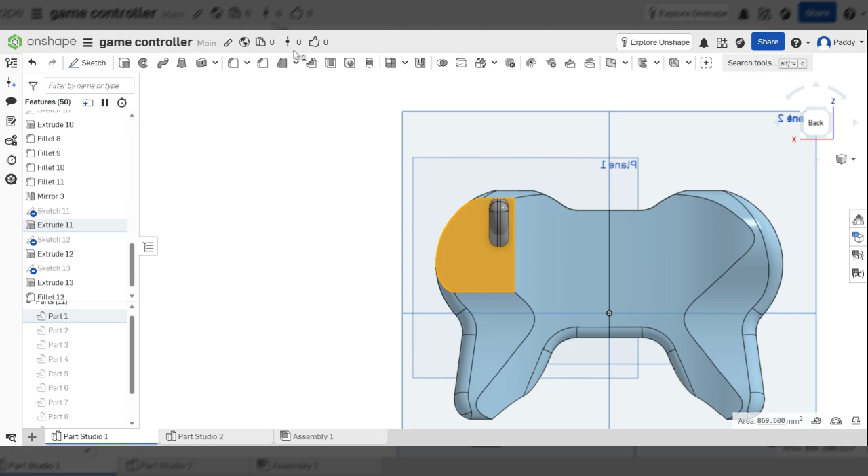Today we're going to be picking up with our sixth video for our game controller, and we're going to be drawing the hood or the cover for the trigger we made in part 4, which you can find in a link along with the rest of the videos in the series below.

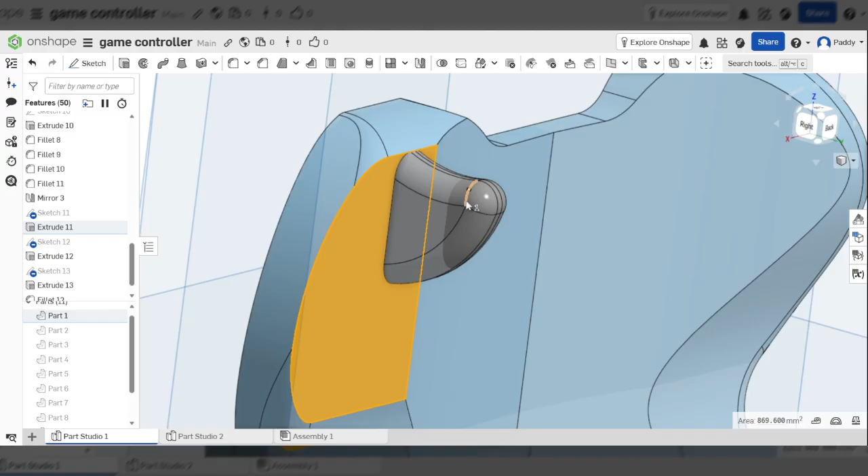Okay, so what we did last session is we cut a flat surface of the back of our remote, and we designed our trigger, and we're left with something that looks like this. Okay, what we're going to do today is, well, the first thing we're going to do is we're going to make something called a mid-plane. Now, we've made offset planes before. We've made a three-point plane that we use for our joysticks. The mid-plane, it's dead easy to do.

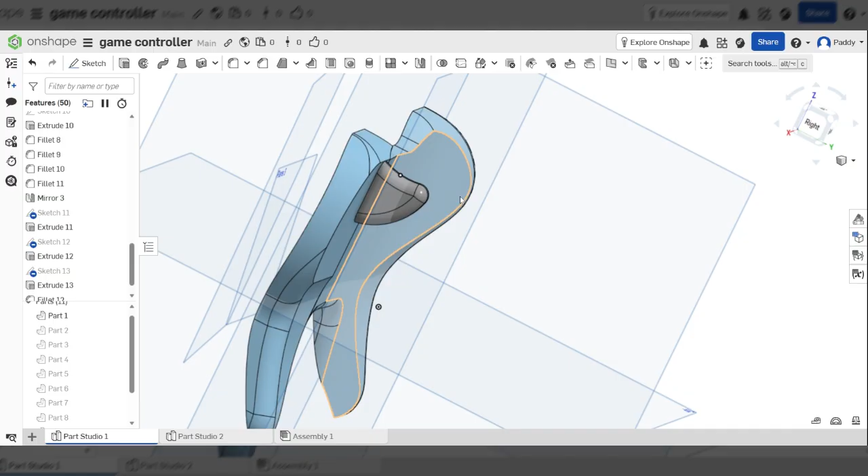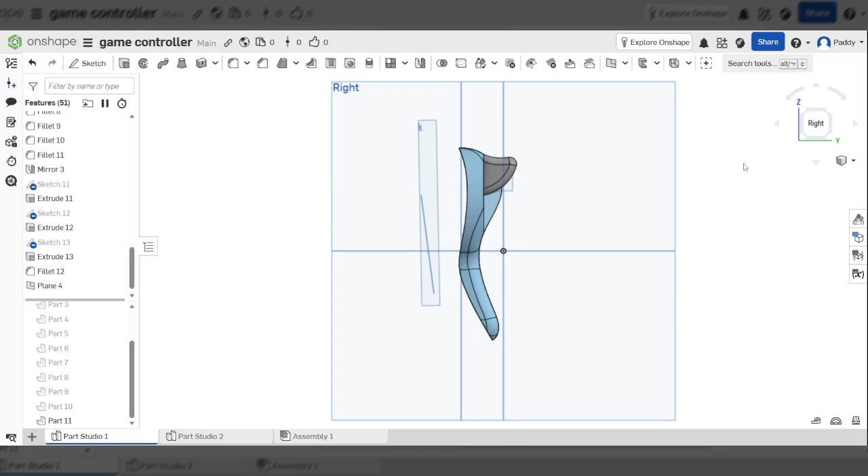We're just going to click two parallel surfaces, and it's going to put a plane directly in the middle of them. So I'm going to click on this surface, the flat on one side of the trigger, the flat on the other side of the trigger, so both faces are selected, and I'm just going to click the plane tool, and you will see it just defaults to mid-plane, and click the tick. And now, if we look, I've got a nice plane directly in the middle of that object.

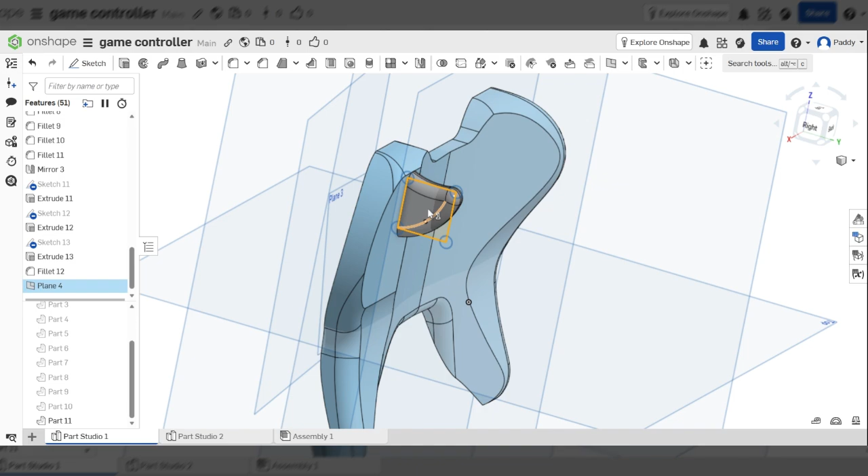Okay, this is where it's going to get a bit trial and error-y because everyone's going to have a slightly different shape. Everyone's going to be working at slightly different positions within the back of your games controller. So if it doesn't work, just go back, see what didn't work out, and just reposition, rejig the sketch you've done, and see if it works the second time round. But I'm going to show you how I would go about putting a cover on my design.

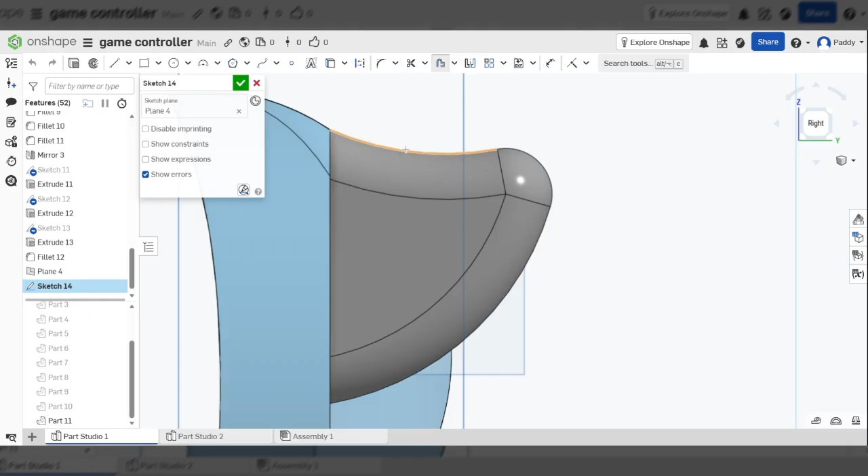First of all, I'm going to start a sketch on this new plane. I'm then going to do something called an offset. So I'm going to do a sketch. I'm going to do an offset. And what this is going to do is it's going to allow me to click around existing lines. And I should be able to pull that in and out so that I've got what's known as concentric curves.

I'm going to leave that there. I want this curve to be the same, have the same origin as my outline. It doesn't have to, but that's what I'm going to do. And I thought I'd show you that just so you can get an idea of what I'm doing there. And then what I'm basically going to do is roughly follow the shape, but just make it a little bit lower and a little bit more to the left so that we cover the back of this curve.

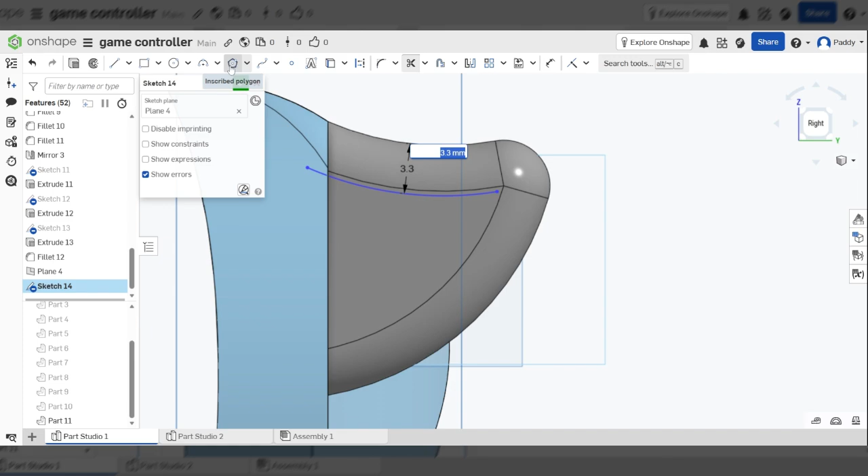So what I'm going to do now is I'm going to get my tangent arc. And what a tangent arc does is it smoothly leads on from an exposed line end that I've got existing. And what that's going to enable me to do is just swing this line round here. I want to make sure I've got a decent amount of clearance. I don't want it cropping too close to the outside of my trigger because I'm going to need to shell this and I'm going to need to do a few things with this first.

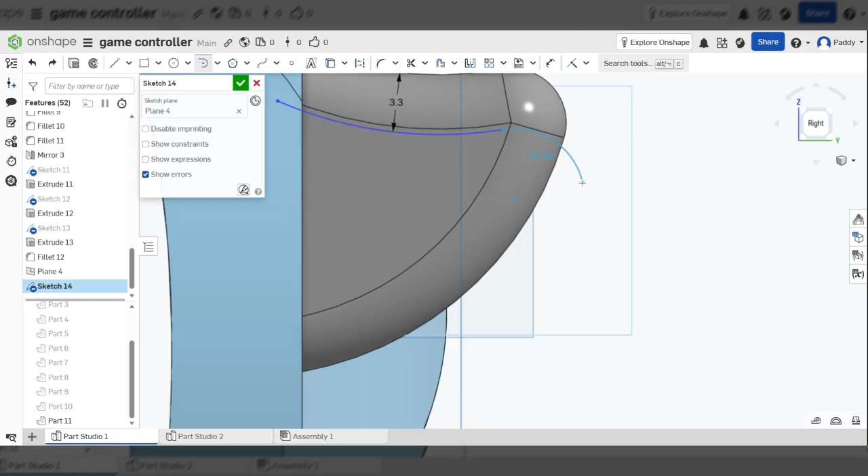So what I'm going to do, I'm going to make it decently pronounced. And I'm just going to swing this. I might even swing it round like that and double click to drop my arc. Again, this is where your design kind of comes into the picture here. Maybe you just want a simple cover that pretty much follows the outline of this.

And you could do that by, again, clicking the offset tool, dragging it out a fair way. Yeah. And then what I can even do is grab this point and just swing this arc round.

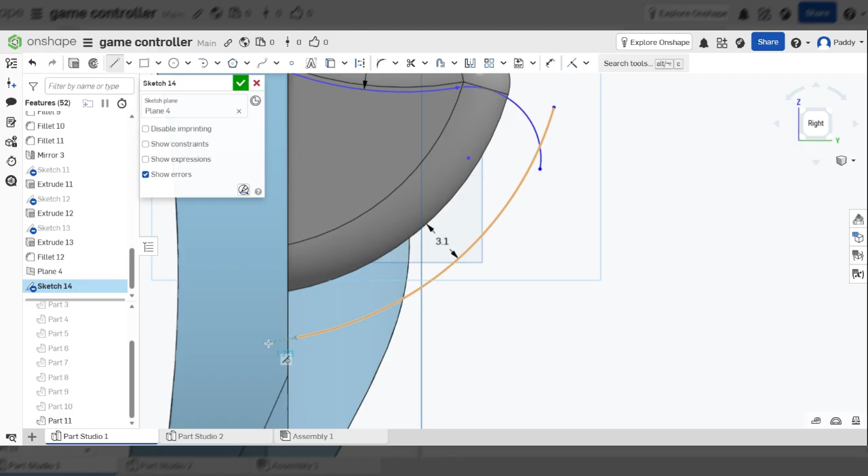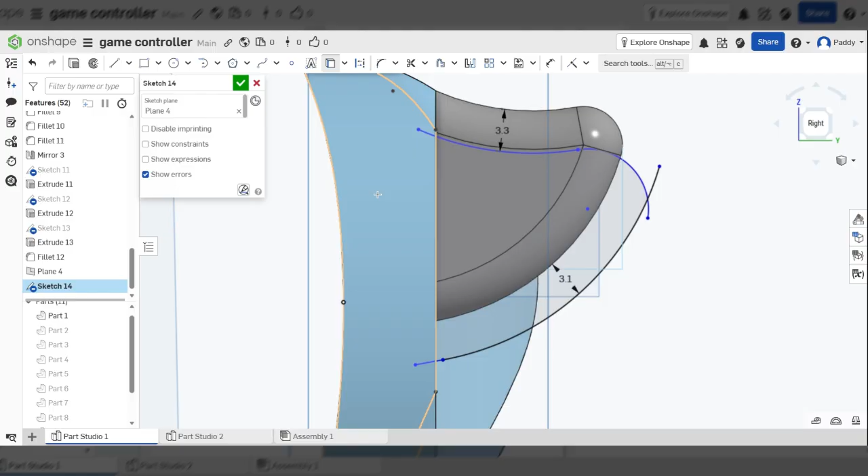Finish this line off. And I want these two lines to be confined by this section. So this is actually the base. I want all the lines to run into the base itself. So what I'm going to do, I'm going to click project. Then I'm going to click on this line to make some of the lines, the geometry, active and in line with this sketch. And I'm just going to go around and trim off everything that lands outside the line.

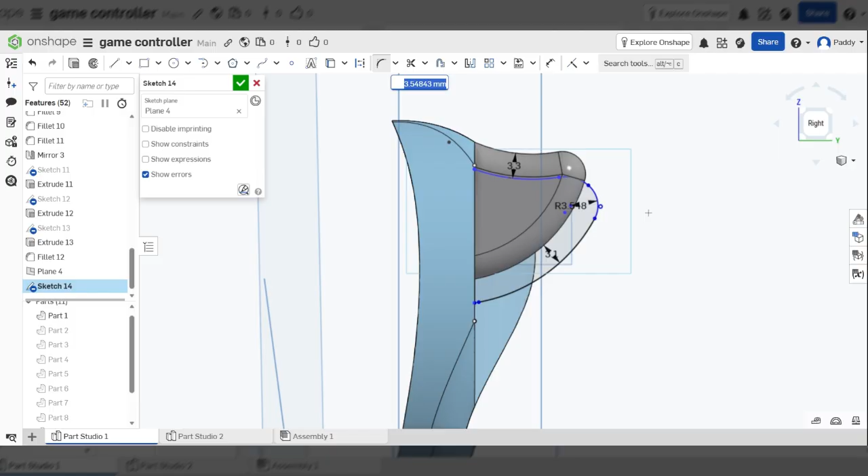So with my trim tool, just get rid of everything, just trim these loose edges. And I've also got these here that I'm going to cut away. Last thing I'm going to do here, I'm just going to put a fillet in that kink just to iron that out. There we go. So that's hopefully going to be the cover of my trigger.

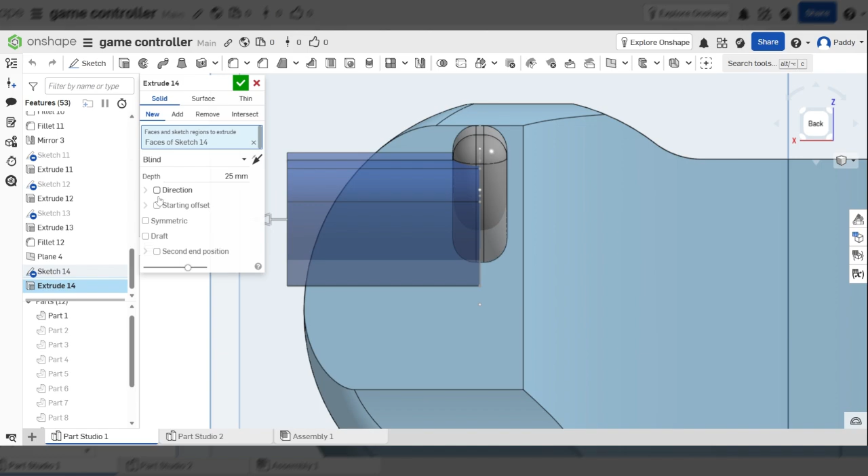What I'm going to do now, going to extrude that symmetrically. And this is going to look a bit weird for a little bit, but don't worry, we'll fix it later. I'm now going to look at the back. So what you're going to need to do for this is in your extrude, you're going to make sure you're on new. You don't want to add, you want a new part. You want to go down to where it says symmetric. And what this is going to do is every time you pull it one way, it's going to do the same thing on the other side.

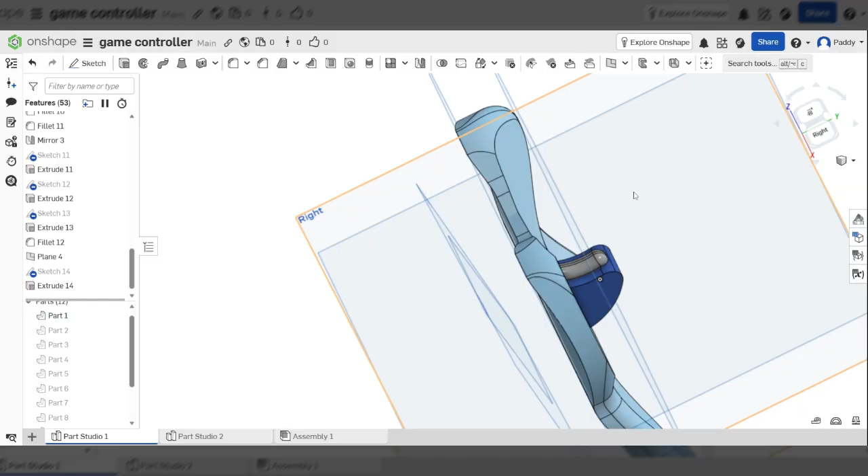And you're probably going to eyeball it to start with. That looks like a decent amount of coverage. I'm going to set that to 25 mil and click the tick. Okay, so that's now become our mold, and as you can see, the trigger is pronounced. So you can actually press it down, but it's got that cover on, like, well, not all, but certainly some remotes do.

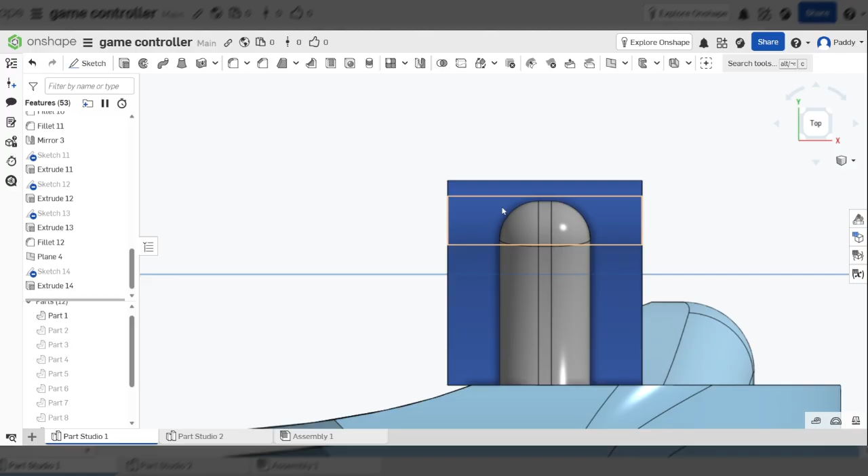Okay, what I'm going to do now is where it gets a bit tricky and a bit faffy, because what I want to do is cut a hole just round the outside here. So we've got a hollow for this to sit in. Now, I could shell it, but that would follow the contours of this blue part, and I actually want it to follow as perfectly as possible the contours of the grey part, the trigger itself.

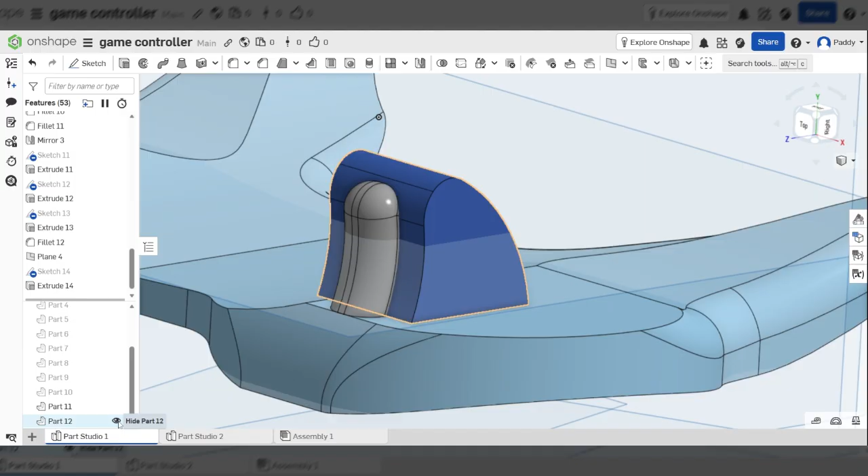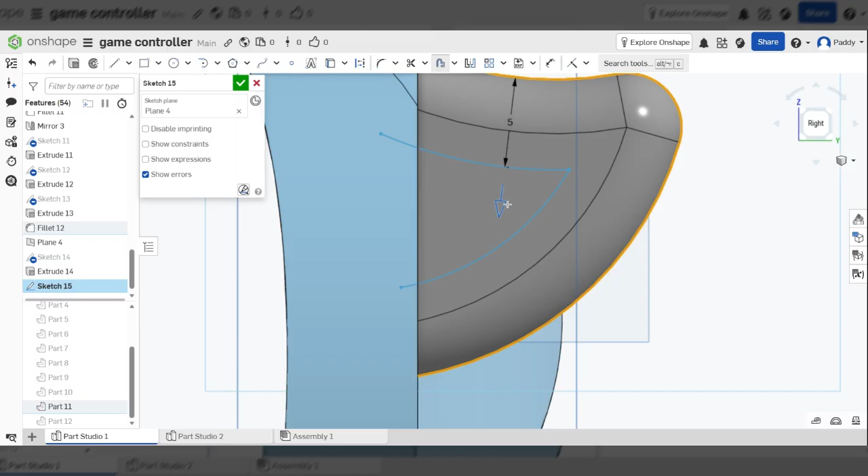So I'm going to start off by hiding the part I've just made. Okay, I'm going to look at my right plane, and I'm going to start a sketch on that same plane again. I'm going to use my offset tool to highlight the whole trigger, and I'm going to pull it out so it's sitting proud by 1 mil. Could probably get away with half a mil, but I think 1 mil's realistic. 1 mil's fine. And then to confirm that offset, just click in a white space.

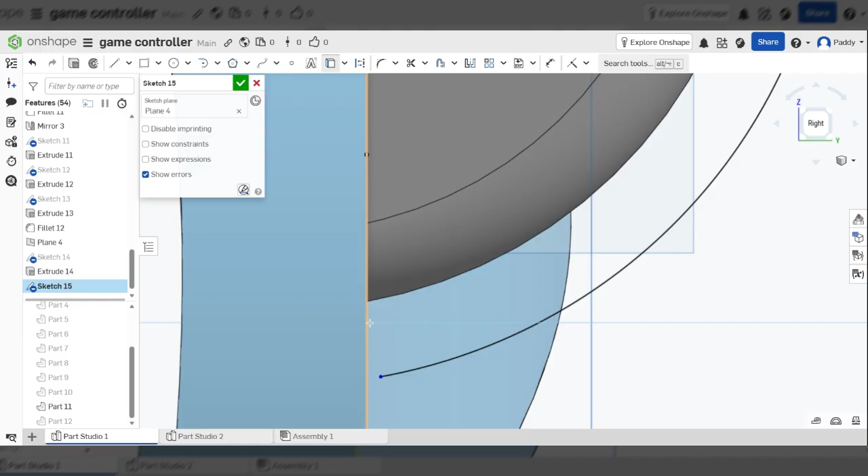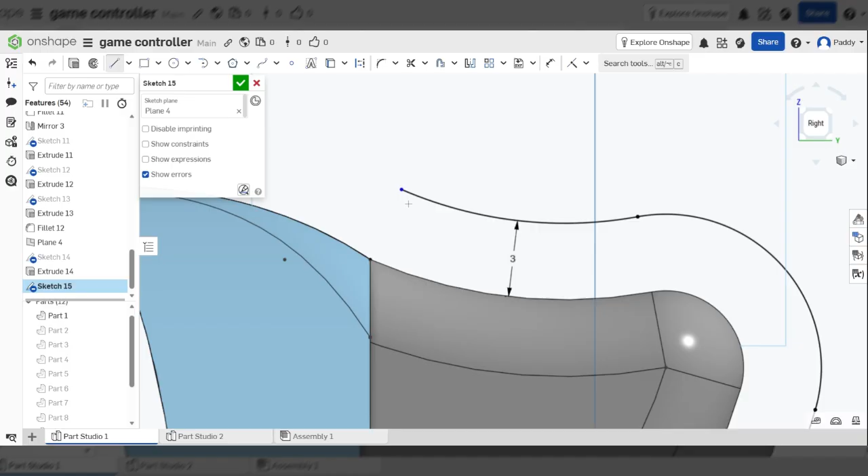And now, just need to again make this line active by using the project tool. And I now just extend these loose ends onto it. The problem is, I don't know if there's a more elegant way of doing this, perhaps by reusing the sketch I've just done, but this does the job. I know it's a lot of faff. Okay, so now I've got a closed shape that is a 1 mil. Oh, it's gone to 3. Should be a 1 mil offset of my original design.

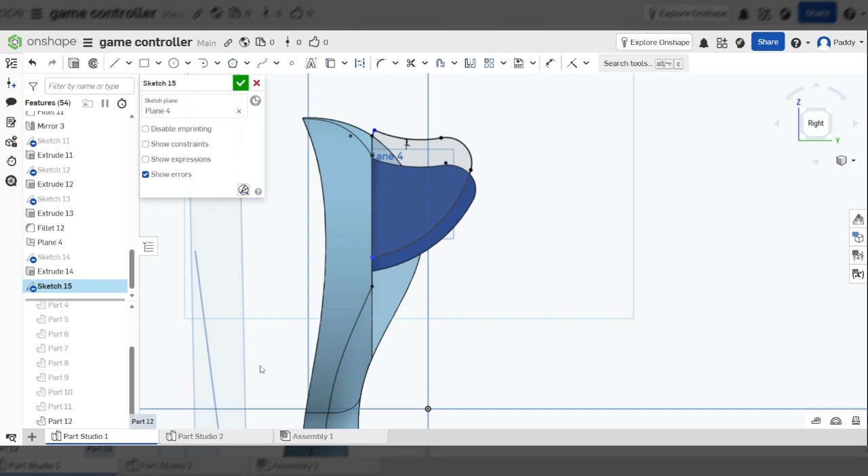What I'm going to do now, I'm going to hide the trigger and I'm going to show my blue part again. And what this is going to enable me to do is cut out symmetrically everything inside this blue part. So I'm going to go to extrude, remove, again symmetric. I know that the trigger was 7 mil, so I'm going to make the extrude 9 mil. We might rejig that again. We'll see how that looks.

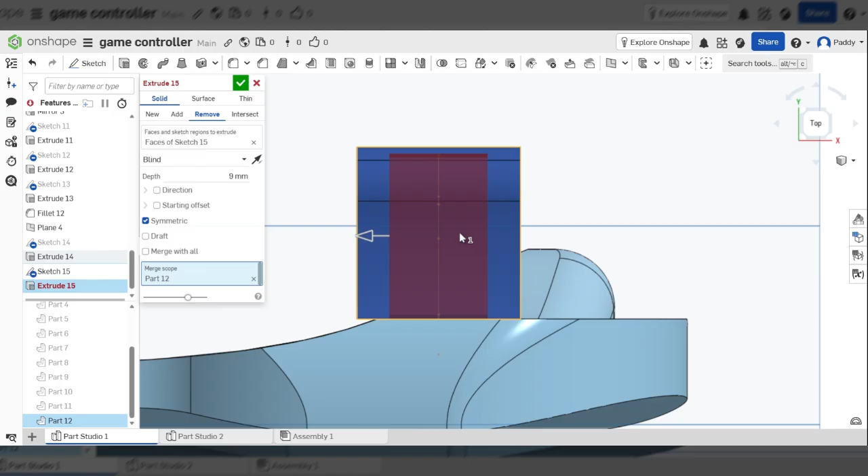And what I need to do is just where it says merge scope, I just need to click on the blue part, and that will allow me to merge it there. And once we've done that, we should be able to bring our trigger back, click the tick, and you'll see we've got that hole cut that is a 1 mil offset that just gives that trigger the housing.

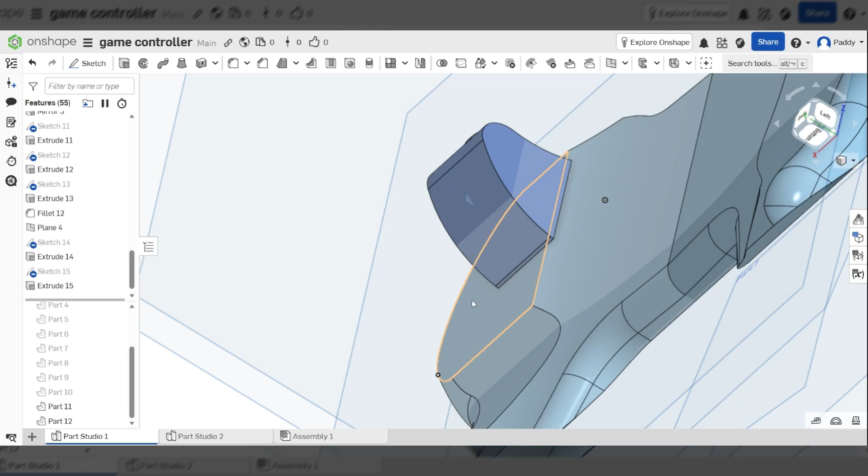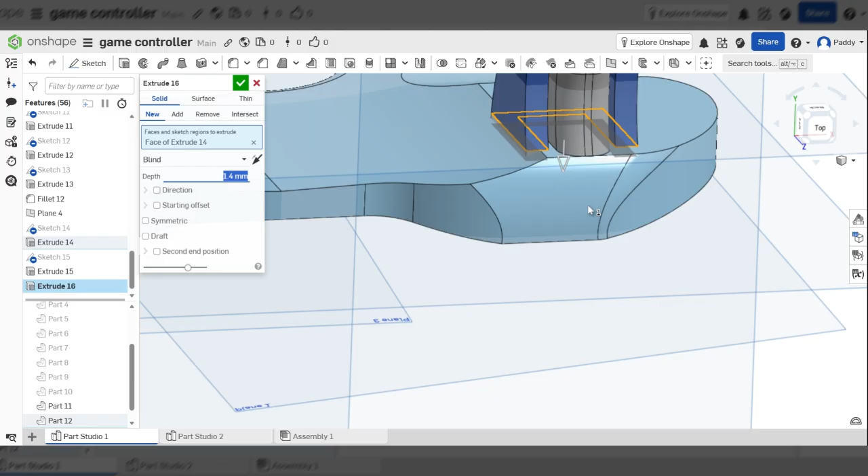Okay, we're almost done now. All we need to do now is put some fillets in. So one thing I'm going to do is, I've just got this overhang. You might have the overhang, you might not. What I'm going to do is just click on the base there. I'm going to extrude it just down a tiny bit. Oh, so that's going into the shape. Okay.

I'd ideally add it, but it's not liking that. So if I click new, I should be able to use the Boolean tool to make all this part the same shape. If I click on this part, and then this part, and click the Boolean tool, which is these two, it looks like a Venn diagram.

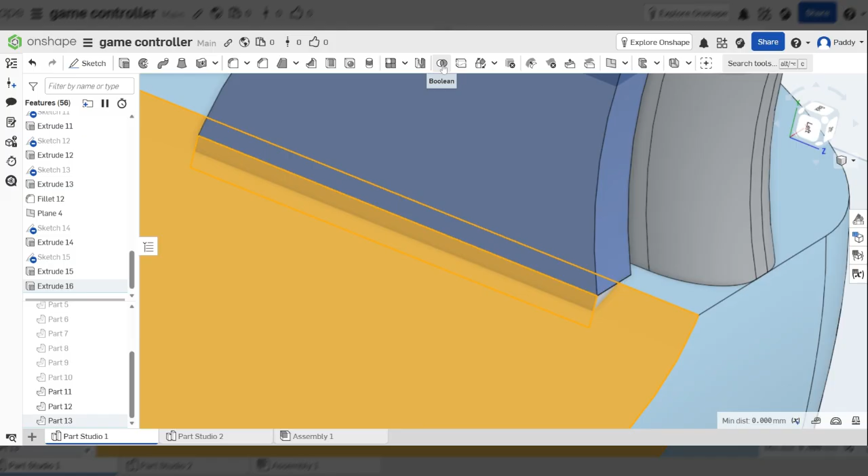Hopefully... it's not done what I wanted there. See if it does these two parts. Yeah, that looks like it's doing it. Yes, so you can see now that has become one part.

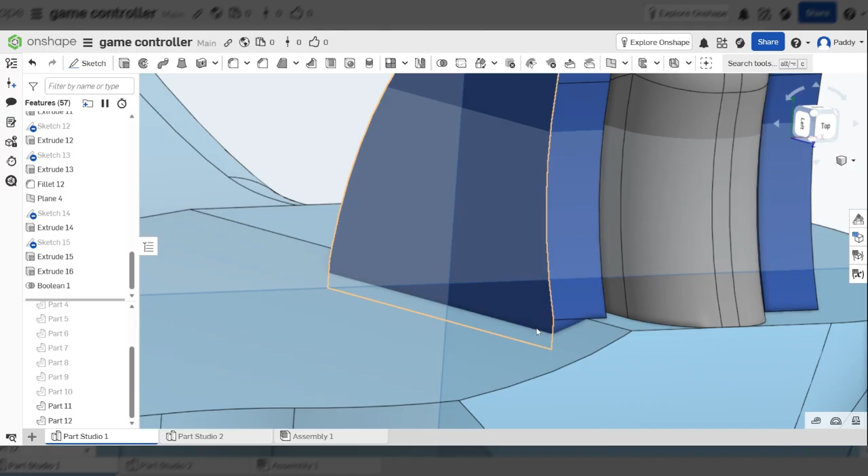And now I'm hoping... yeah, that looks like it's going to do it. Now it's all gone blue. Don't worry about that, if it changes color, we're going to sort all that out later. Right, okay, so that's where we're up to.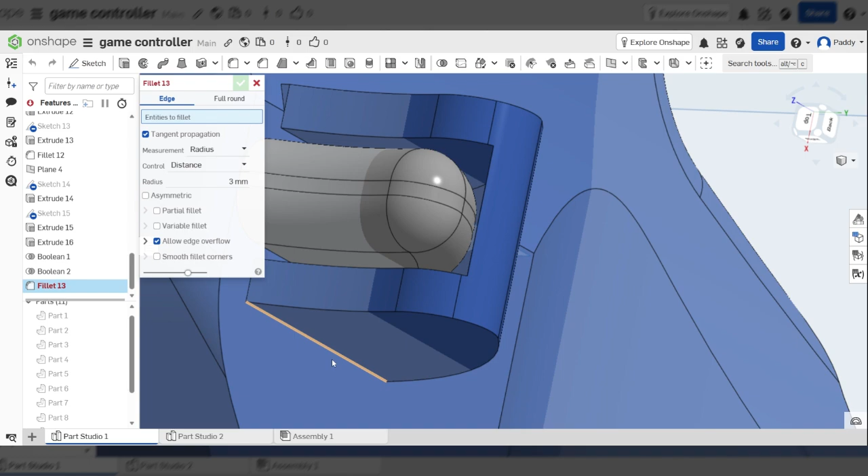All we need to do now is put some fillets on, and you need to be careful what you actually click here. You want to be clicking edges rather than faces, because you probably want different radiuses on the outside, the inside, on the base, to join those bits. So just watch out what you're doing.

I'm going to start off by putting a fillet there. It was about 3 mil, so I'm going to see what 2 mil looks like. I reckon if we've got 1.5 mil, we can get that on both sides. Oh, look at that.

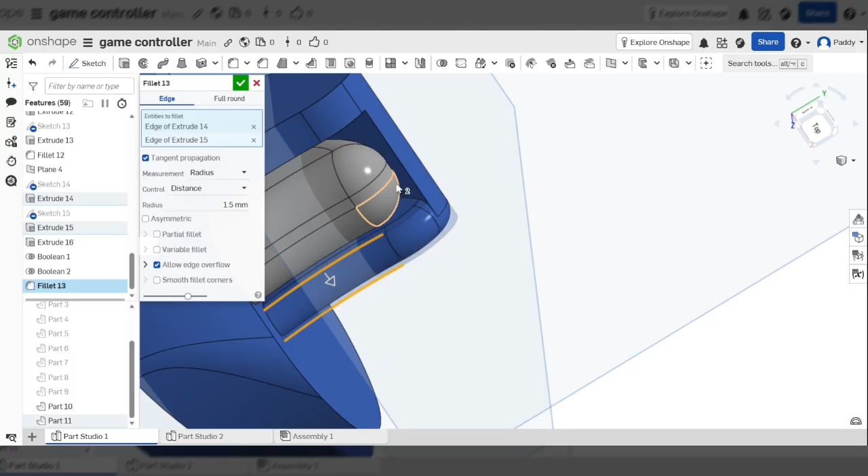That will work, I think, just not in the same function or action as the rest of it. Okay, so put that on, and that's all nice and rounded. I think now I should be able to put a 1 mil.

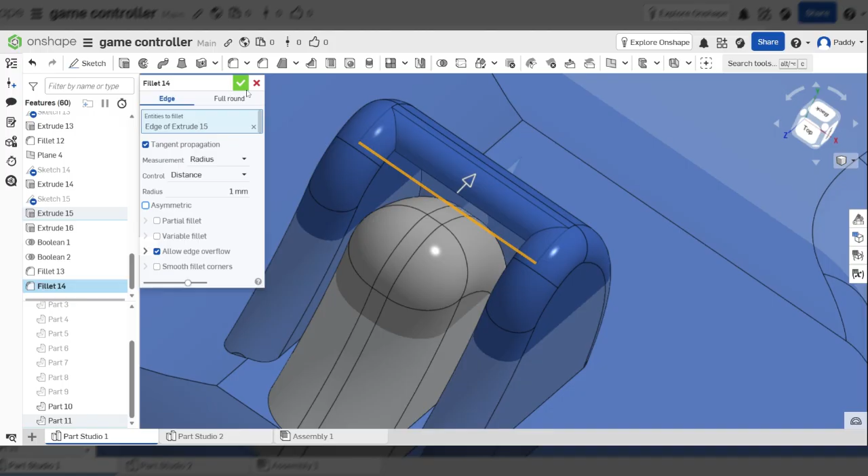It might - you get errors with fillets if they're just a little bit big. You might want to just reduce them, like so. And now I want a nice big fillet, ideally as big as possible, going around the footprint of my shape.

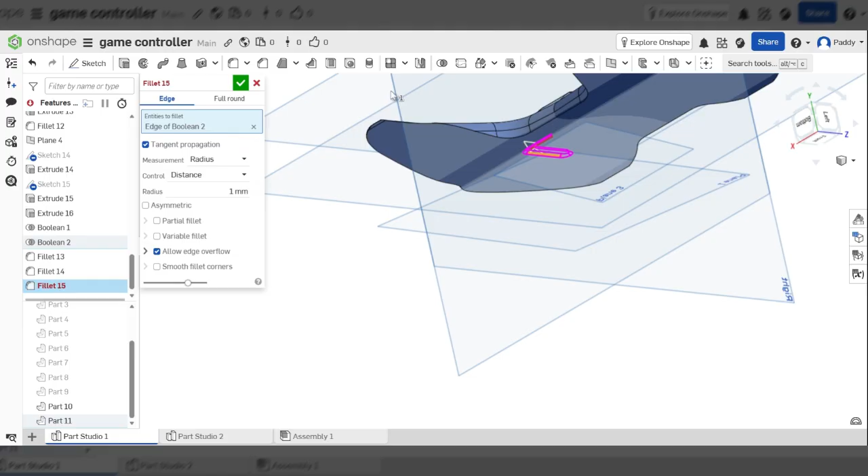And I'm hoping it's going to let me do that. Oh, it's not. I think things have just got a little too complex round here.

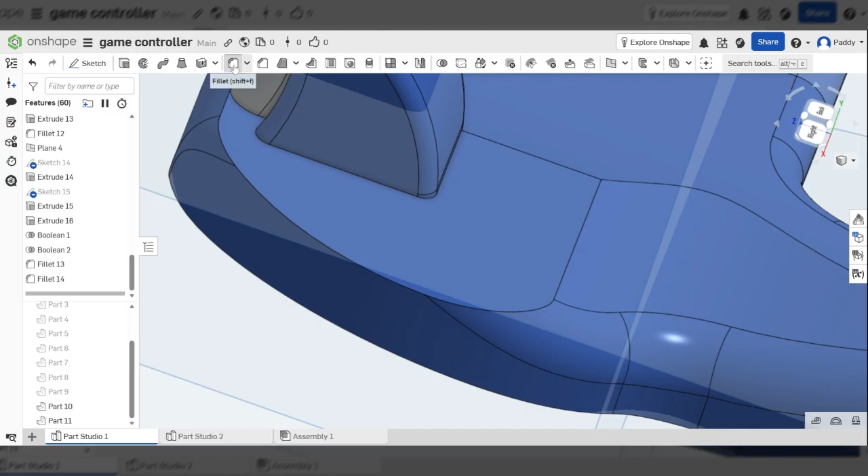It's going to let me do a 0.5 mil, which is not ideal - I'd want something quite a bit larger. I want a nice flowing contour that goes into the shape. Let's see if we can get around this by selecting the other side. I don't know if we will be able to. No, that's even worse.

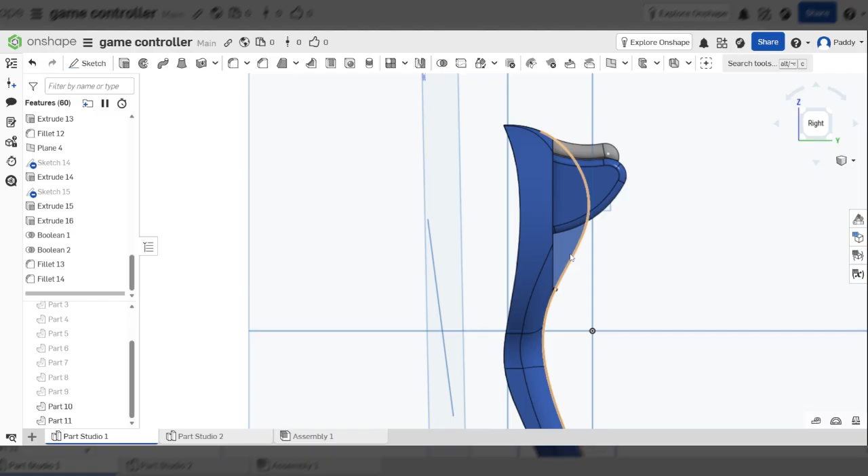Okay, what you're going to do is have a play about with that, see how nice you can get that looking. At the end of the day, you can actually alter the profile, so you might want this to come down a nice flowing curve like that. I've done it quite compact and quite closely cropped to the actual trigger - yours doesn't need to be like that.

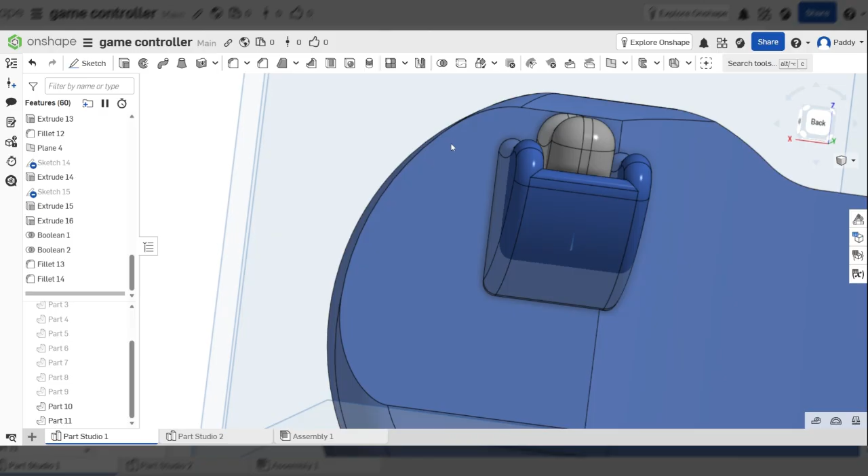But what you're going to do is go away and have a play about with putting fillets on and see what sort of shapes or designs you can come up with. Now you've got that video and that process, I'm sure you can come up with all sorts of shapes, sizes, designs that you might want a games controller to showcase.

Okay, that's going to be it for today. I know that was quite an all over the place video with the different things and different processes to get here and there, but hopefully you've got something that looks like that.

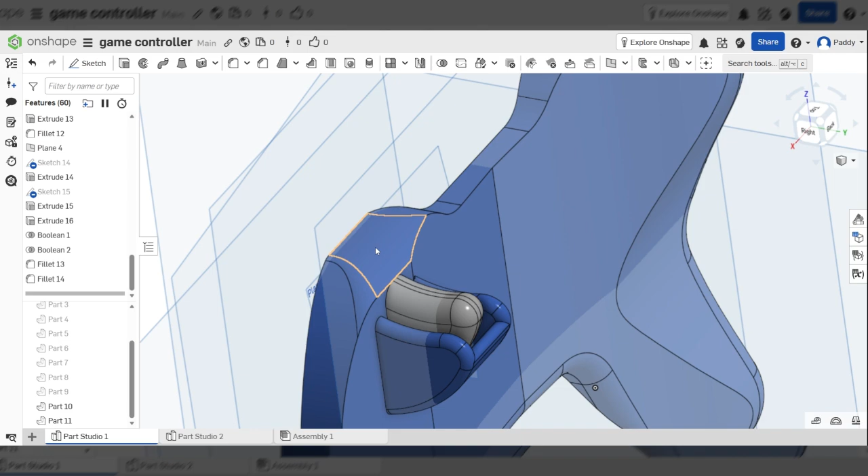In the next video, we're going to be adding the top buttons on. And again, don't worry that it's not repeated on the other side - there is a way around that I'm going to show you when we get to it.